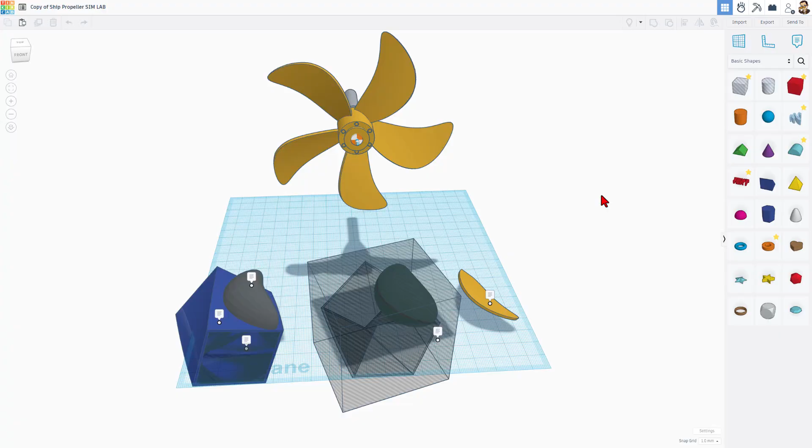When you open the project, there are notes that explain things. This right here is the profile of a pineapple shape. You can tweak these numbers to find the exact number you want.

Now the second part of this that is awesome is the twisted polygon. If we click on it, you can see we can pick how many points—this is a four-sided shape. We picked a radius, the height, the bottom twist, and the top twist.

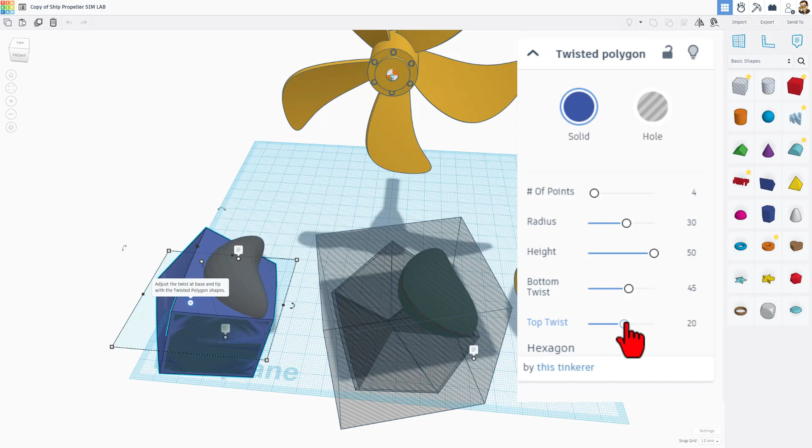And if you look right here, there is a second one that is just a little bit smaller inside. This is going to give us what's called an inverse hole. I'm going to hide the inverse hole for a second so you can see this once again is our pineapple.

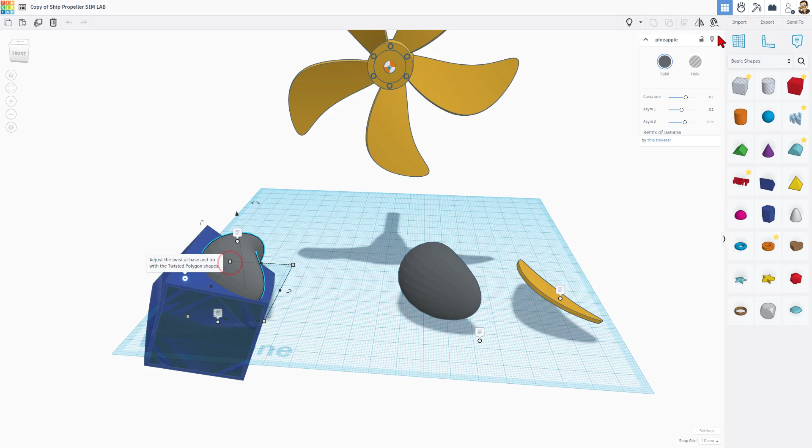Let me show you how this was created. These two shapes right here were grouped by doing Control G. This shape was then converted to a hole. Now I'm going to bring this back, and you can see that this was cut out of a cube, just making sure that the cube, if we ungroup, was larger than our original shape.

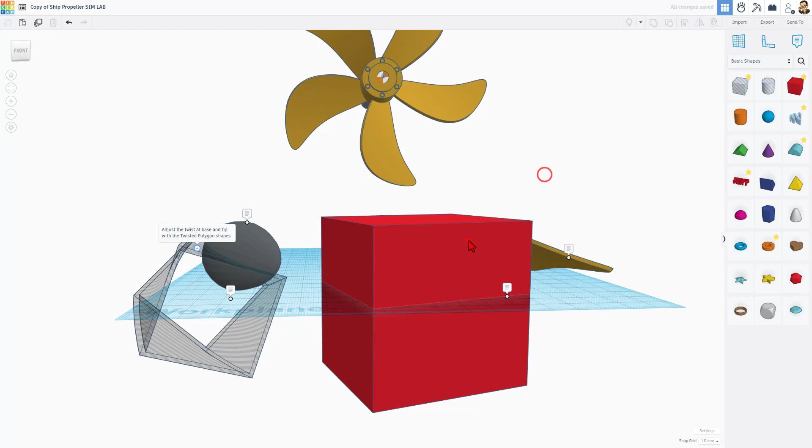Right here, if I do T for transparent, you can see how that is going to slice through with that inverted hole. Once again, these two shapes, Control G to group.

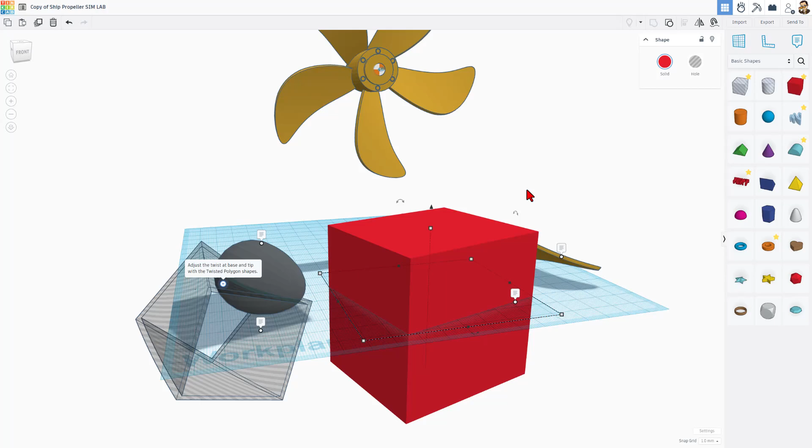You do have to wait a moment because this is pretty complex. Turn this into a hole, and if you look close, this sliver is all that's going to remain after you take those two and do Control G to group.

Bingo! Insanely cool propeller. Friends, now that we've got this blade, let me show you how we align these.

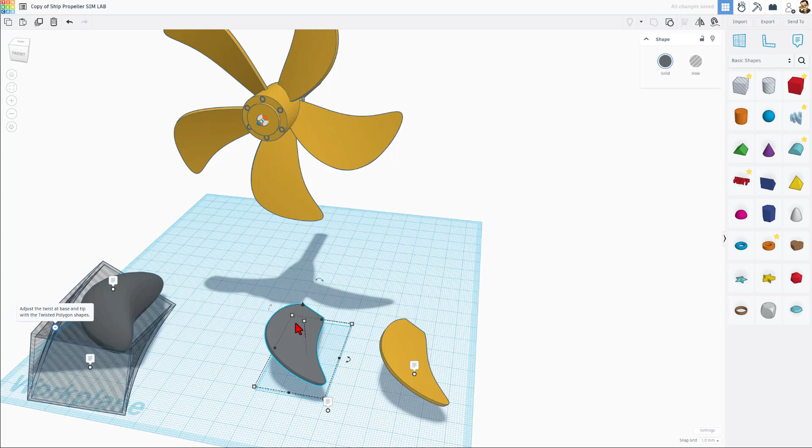Control D, I'm going to shift nudge to move this out here so we can build it. We are going to build 5 of these blades. So what you do is take 360 and divide it by 5, because that's the number of degrees in a circle, and it lets you know that each rotation needs to be 72 degrees.

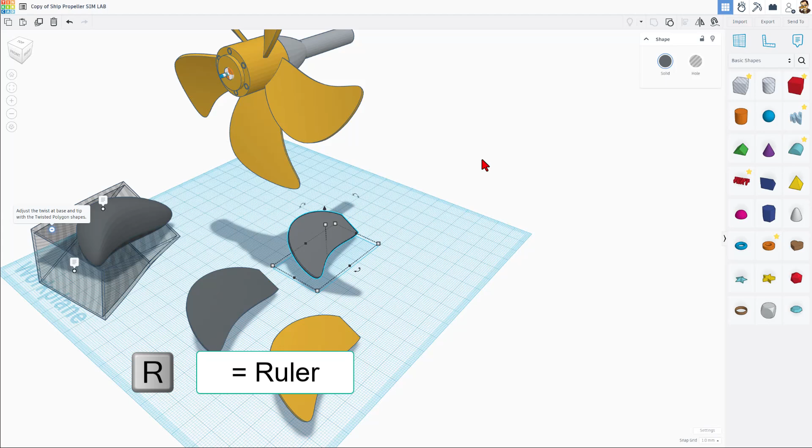So here's the trick we're going to use. If you do R for ruler, set this little fella out here. Let's quickly hide the original one so it is out of our way. I'm going to switch to a top view, and I'm going to switch to the flat view. And we want to make sure that we're using the midpoint. If you click on this, it says use midpoint—that means it was using the endpoint, and we need to click it so that it is using the midpoint.

I'm going to set the gap in this direction to -30. This is just guess and check as I try and find that distance. And then I want this to be 0, so I'm going to just type the 0.

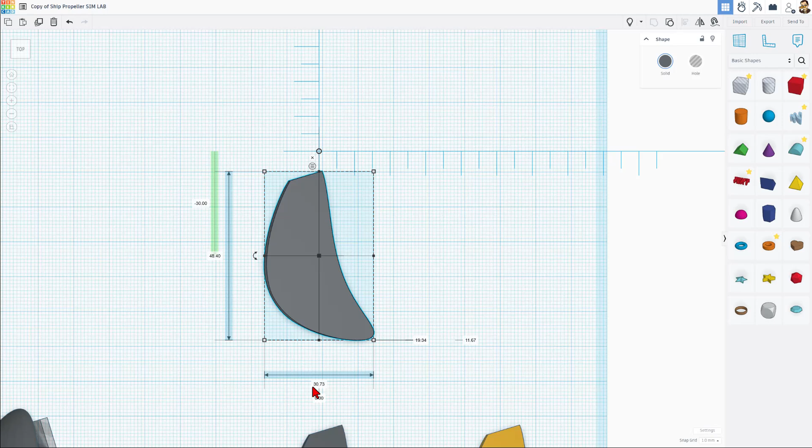Now, friends, we're going to do Control D. We're going to rotate this 72 degrees by moving out, letting go, and then clicking this spot and typing 72 and pressing enter. Make sure you do not touch anywhere else on the screen. We simply want to click in the boxes.

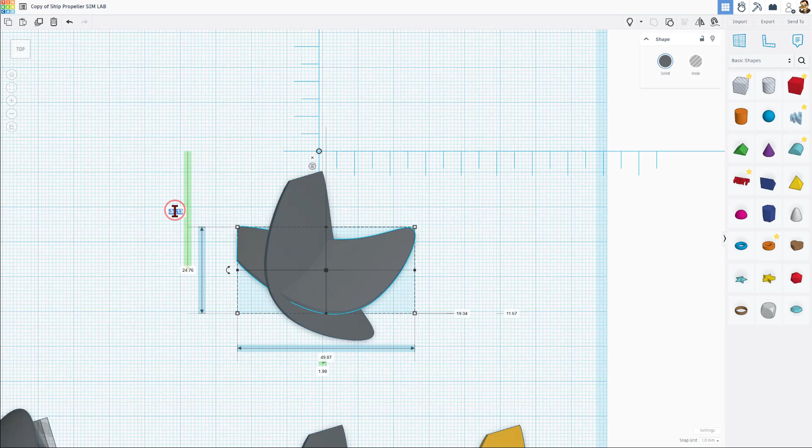We want this one to now be 0. Notice it's still aligned to that midpoint. And we want this one to be the 30. Notice the gap is perfect. And if you don't touch anything else and do Control D 3 times, you have just completed a perfectly aligned propeller. How cool is that?

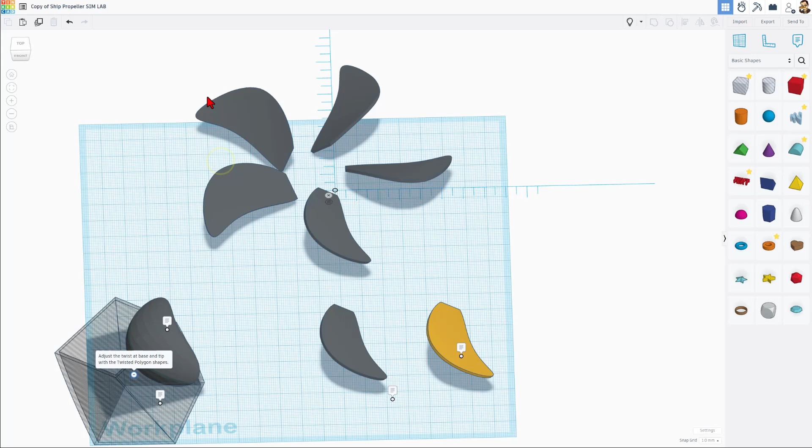All because we used the ruler and we saved the nudge and rotate from that first one we did. Just because it's a pretty slick strategy, I'm going to do it one more time with them a little closer together. Once again, R for ruler. I'm going to click on my shape. I want to make sure it is using the midpoint, which it is.

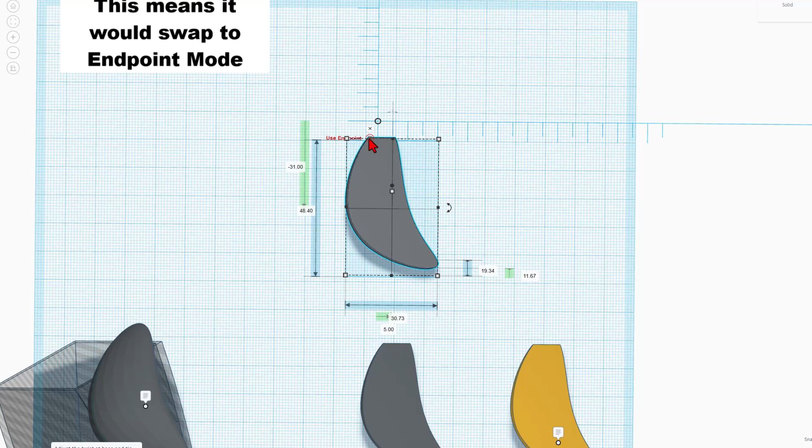We're going to set this one to 0. We're going to set this one—I'm going to try -25 this time, so it's a little closer. Once again, we click on our shape. We do Control D. I'm going to rotate it that 72 degrees. Once again, click the box, type 72, and press enter.

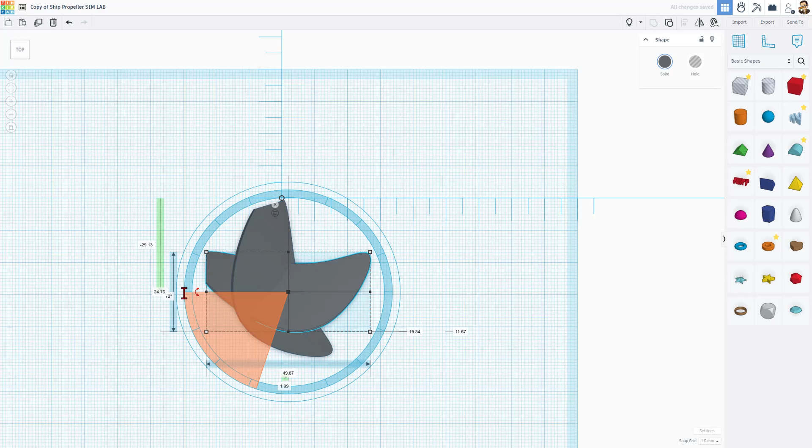Now change our numbers. This one becomes 0, and this one becomes the 25. And when you let go, simply do Control D again and again and again to have all the blades created.

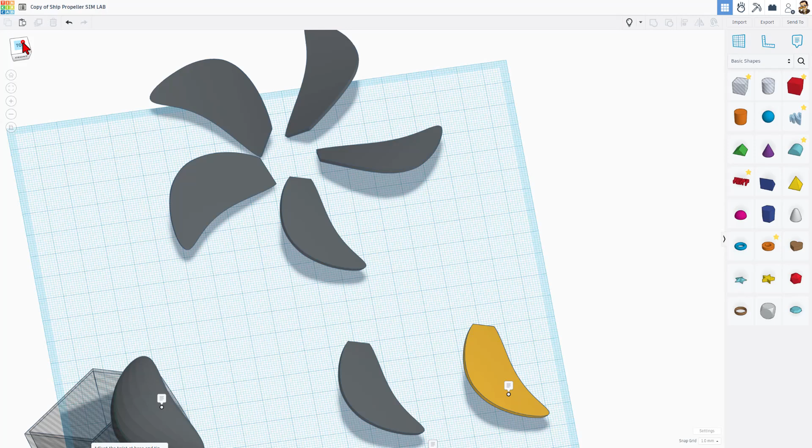How cool is that? Let's quickly add a hub for our prop. I'm going to select all of these and do Control G to group, that way they will stay together.

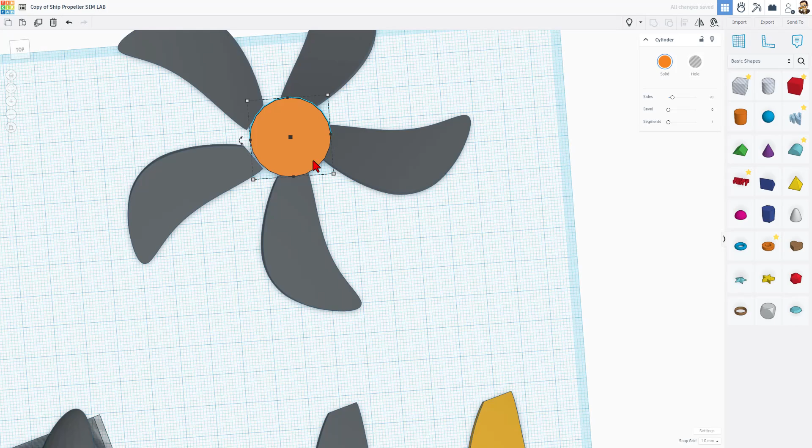Let's bring out a cylinder, set it in the middle. Let's do Alt Shift and stretch it till it touches all the propellers. Let's see what happens if we do L for align, and make this one the boss. Will it actually go center and center? No, it won't, but we can just nudge it until it looks the way we want.

I think that's pretty awesome. I'm going to bump up the sides, add a bevel of 2, and change the height a little bit. Then I'm going to quickly cut off the back.

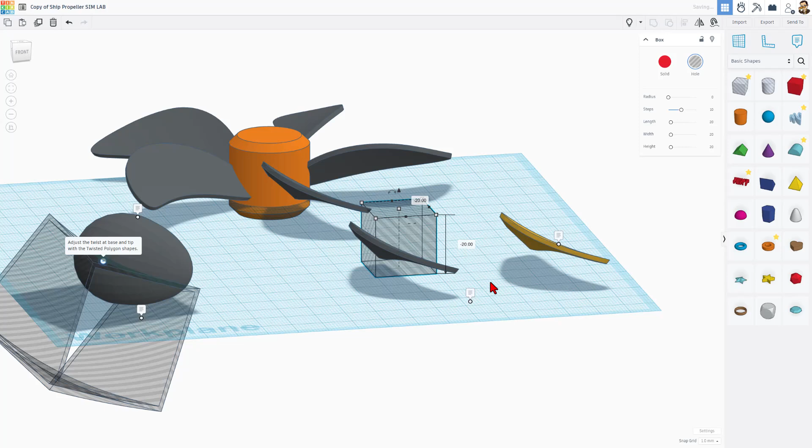Let's do that by just bringing out a hole. I'm going to drop it down to 0. Notice all we had to do is -20. Then I can just stretch it larger in each direction and Shift select this part to do Control G and group.

Set that to a gray. And just like that, our prop has been created.

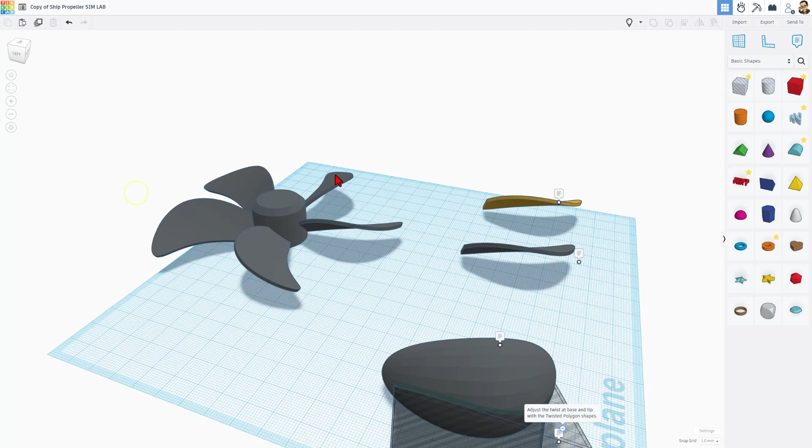Let's quickly switch back to perspective view and use show all to take a look at ZDP's original creation. You can see here it has a Sim Lab axle added.

Notice you can find these in the Sim Lab, and then when you click on them, you can change its torque and speed. If we go to the Sim Lab right now, it takes a moment for all of these shapes to have their geometry become final. That is what you just saw right there.

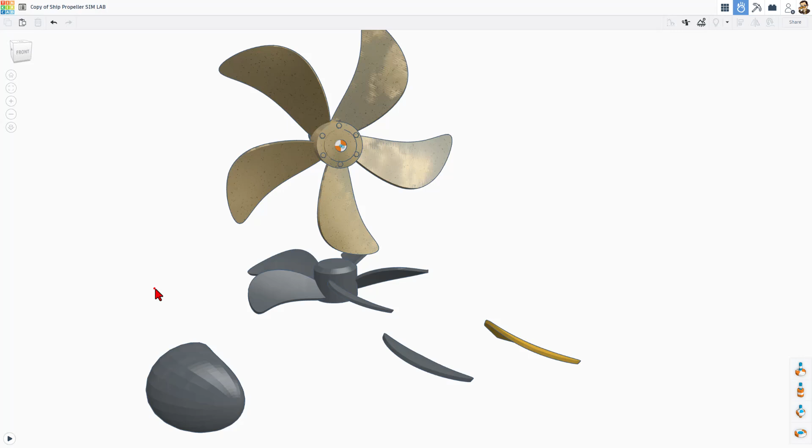I'm going to take these and make them static so they cannot fall. And of course, this one I do want to show you has been switched to metal and yellow, so it looks like brass. When you hit play, you can actually see it spin.

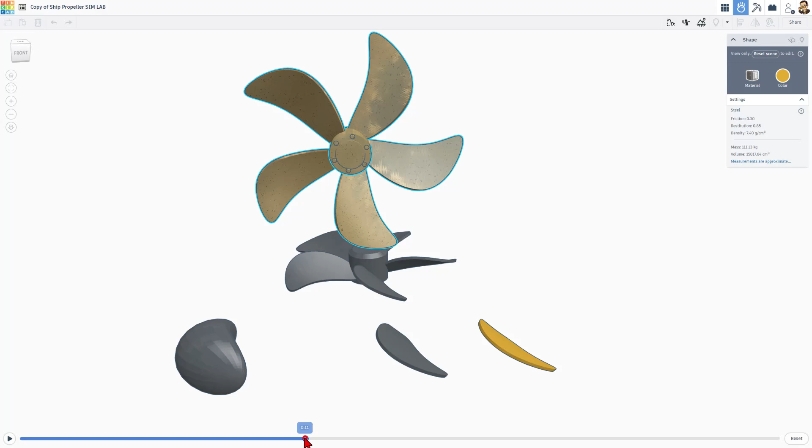How cool is that? I'm going to hit pause. Notice you can slide this back and watch it from every angle. It is a fantastic way to learn a little bit of physics as you design.

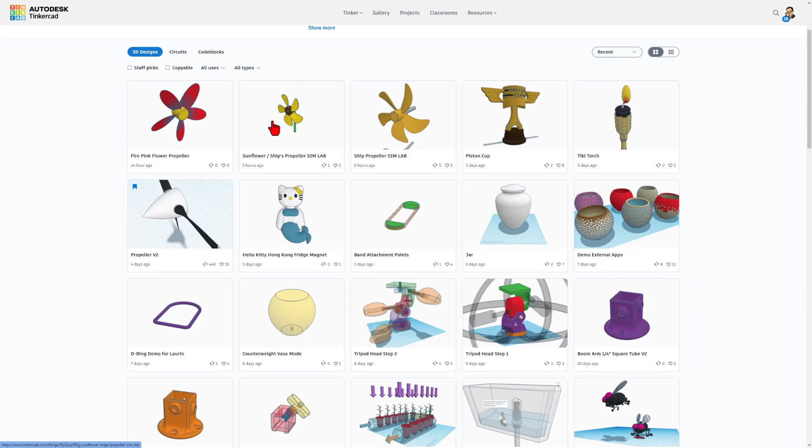Now, before I wrap up, I want to show you something else cool. If you click on that design, you can go back and see that it was made by ZDP189. When you check his profile, you'll notice he has a ton of amazing designs, and check it out, different varieties of this project. Once again, don't forget that golden rule, give a reaction before you copy and tinker.

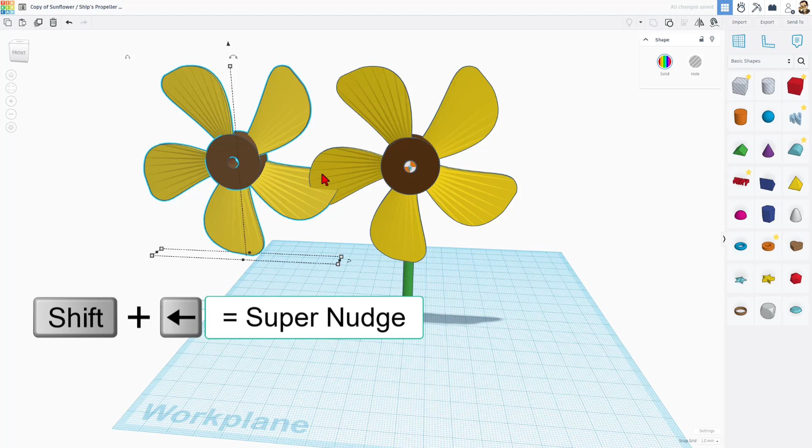But once you get in, you can use these same techniques to explore what he did. I'm going to do Control D, super nudge to move that away, making sure that it's not colliding with the other one. Now I can click on it and do ungroup and ungroup to see what was used to make this.

So right here we've got an inverted hole again. This is parts set together to cut out this part.

Now this is a fun one called the fidget spinner. Notice you can play with all these different measurements as you adjust it to make your fidget spinner look just the way you want. See how they just slide in and out?

I'm going to do undo so it goes back to the original that he had, but there's tons of room for you to fiddle with this.

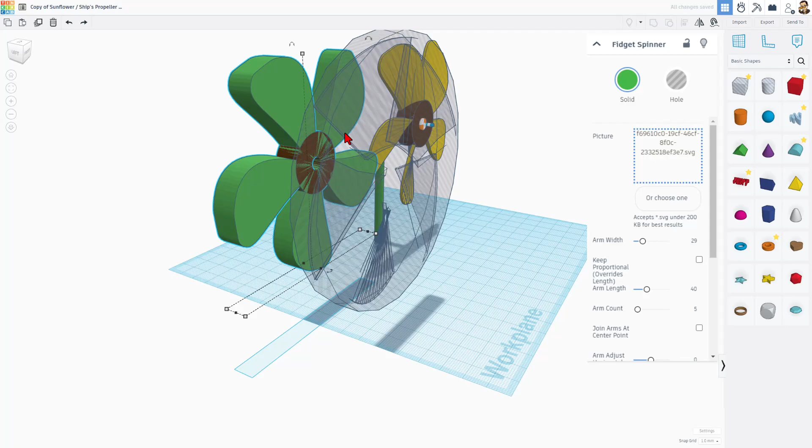And then let me show you the slick trick he used for the inverse hole. If we ungroup, this is going to be the piece that cuts this. If we check real quickly, see how this is 10 and this is 10. That guarantees that's going to fit.

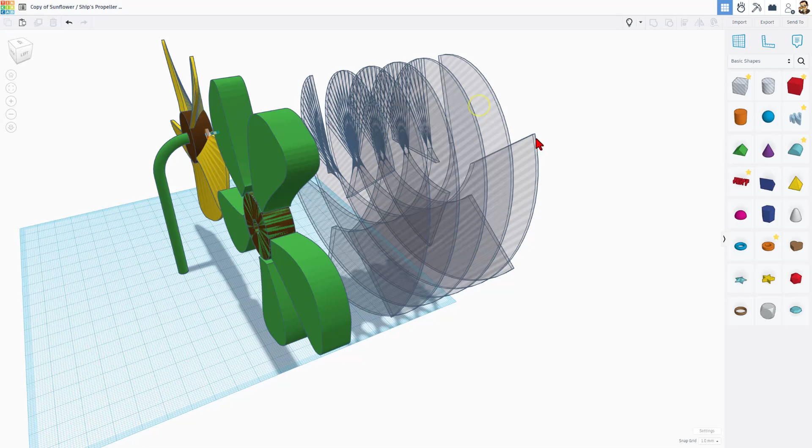I'm going to hide this for a second. And I'm going to show you the cool shape right here. This is called the screw thread.

ZDP chose numbers to get the rotation that he wanted. They were rotated 72 degrees, just like the previous one, but then only this chunk on the end was kept because it's going to cut this shape.

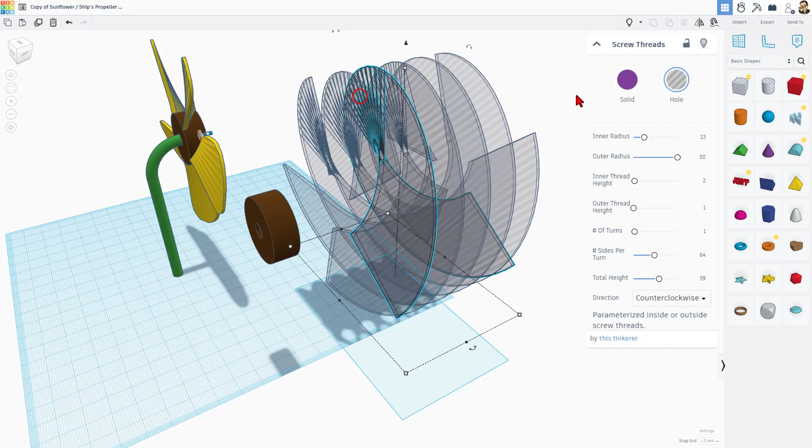If I hide this real quick, let me show you how there are 5 of these. I'm going to just switch the colors so you can see which is which. And one final one, let's make this the red. That way you can see that there were 5 of the same shape rotated.

Now if we do show all and I grab all of these, I'm going to cheat by grabbing them out here. You can see how this was grouped.

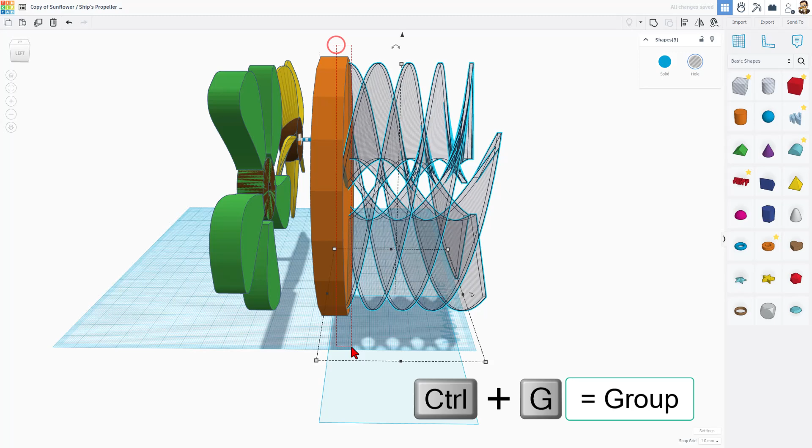Created that inverse hole. And then when we nudge it back in here, make sure it lines up.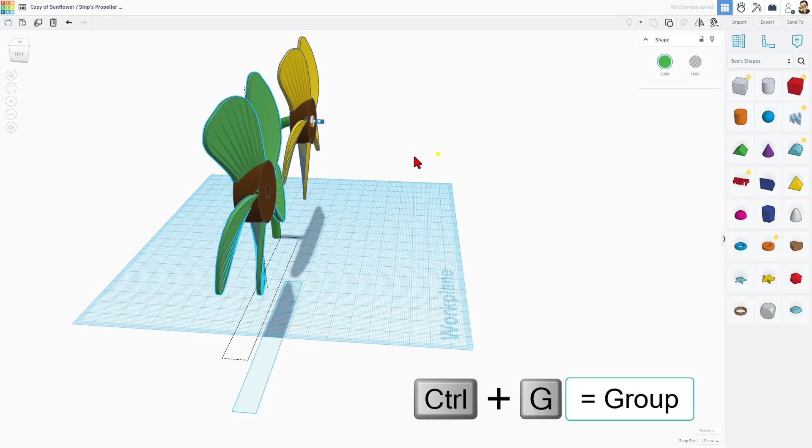Let's select all those. Notice it says 2 shapes, and do Control G to group to make that wicked cool sunflower. Once again, a fantastic technique shared by ZDP189.

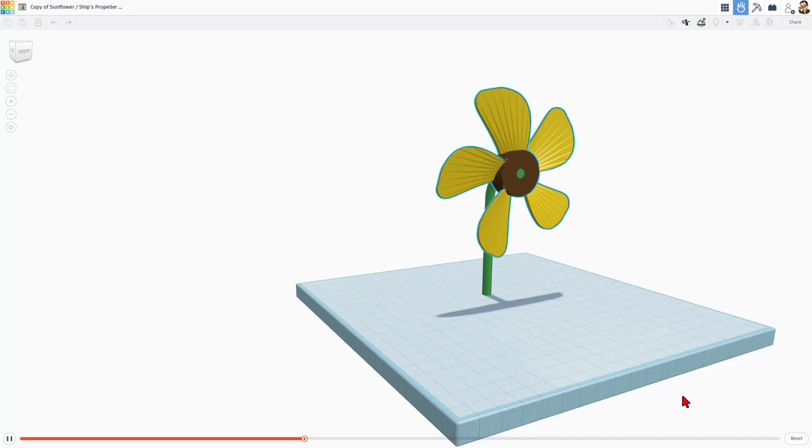I'm going to delete my version real quick and let's check this out in Sim Lab. Once again, if we go down here and hit play, bingo, we have got a spinning sunflower. Well done, ZDP, and thank you for sharing.

Friends, as I wrap up, I want to say thanks again to ZDP. I also want to remind you that all of these shapes can be found by clicking up here and typing in their name. Today we played with the pineapple. We also played with the fidget spinner. These are a ton of fun, you should track them down. I will also let you know I've got a video using the Pro Gear, and I will put a link to that up in the cards.